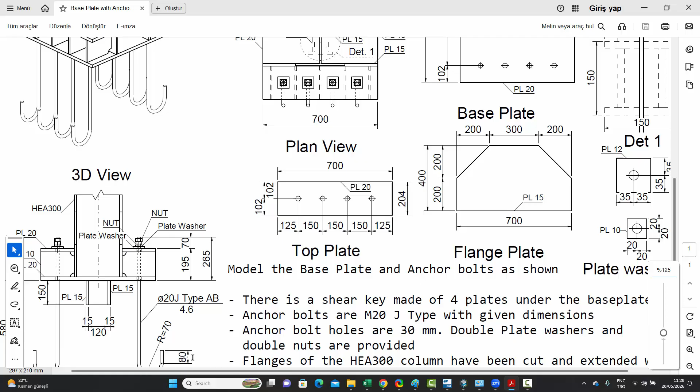So this is the assignment which we have. It's basically a base plate with anchor bolts, and that's what the exercise will be. The base plate is different from normal base plates in the sense that if we zoom in over here, you will see that it's got two levels over there to make it stronger against bending.

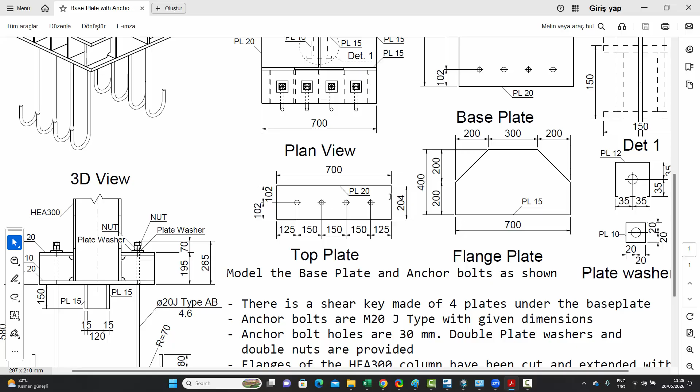So the base plate itself is drawn out over here. It's a 700 by 700 base plate, and then at a height of 195 millimeters above the bottom of the base plate, you have another plate on both sides, and these plates are called the top plates. Their dimensions are given over here. And the column itself, which is an HEA 300, the flanges have been cut out because these plates over here, the flange plates, are basically extending the flanges into the base plate as shown.

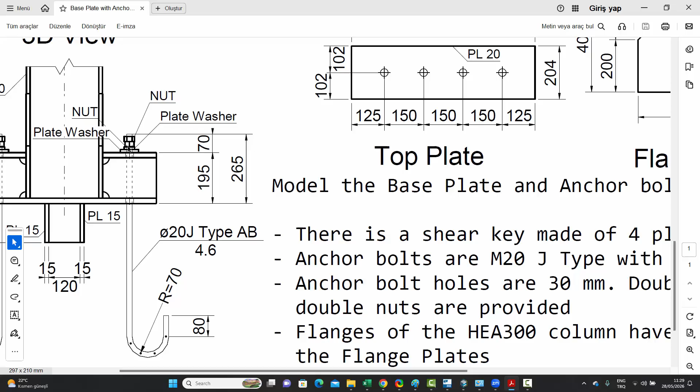And then the details, of course, of the anchor bolts themselves, what the diameter is and what the bending. These are J-type anchor bolts. So what the diameter will be, what the radius will be, how much the extension will be, how many plate washers we will need at the top, and a nut, and the length to which it extends below the base plate. All that information is given, and we need to model this in Comosys.

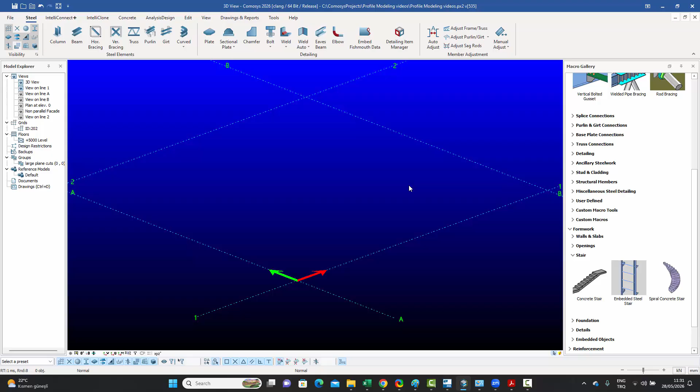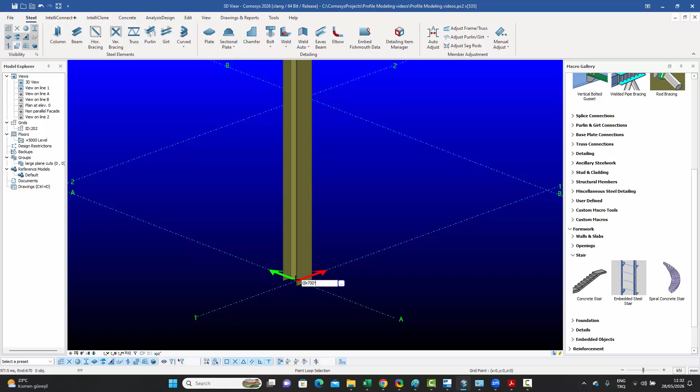So let's begin by creating the column and the base plate, which, like I said, is 700 by 700, and the thickness of the base plate is given as 20 millimeters. So we go to the model, our column command, we enter a column over there, we change the section to HEA 300. And then we just need to create a 700 by 700 plate. So we can go to the plate, because it's a rectangular or square plate. We can just hover over this center point, the grid point, say enter, say DR 700 by 700. And when we say enter, that plate will have been created.

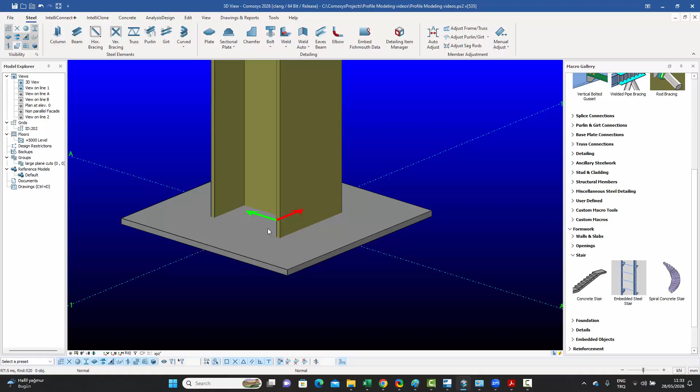Now, although not given in the exercise itself, typically the bottom of the column is actually the bottom of the base plate. So if I look at it from the side, the plate is entered as middle, which is not what we want. So I'll just select it and press Control W to bring it to that position. And since it's a 20 millimeter plate, all I need to do is double click on the column and give a start offset of 20 as well, so that it's not clashing with the base plate anymore.

Now let's get back to the drawing and focus on these flange plates, which are basically going to cut the flange of the column as well. These plates are given as 700 by 400. Let's not worry about these chamfers at the moment. So a 700 by 400 plate I want on both sides of the column. So I can go back in, choose my contour plate command, and just use these points over here because they're easily available. Don't worry about the location at this point.

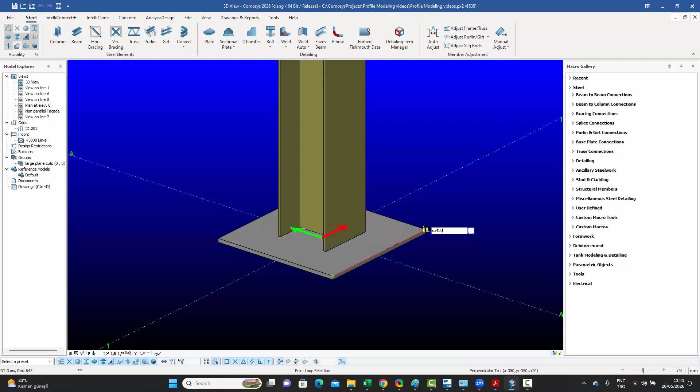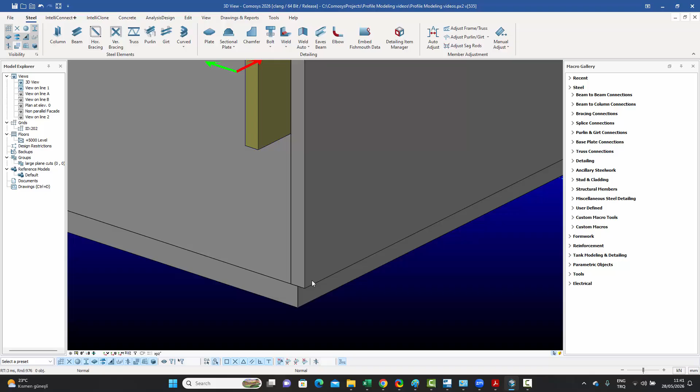Press enter, say DZ 400, go vertical, then hover over this point, enter DZ 400 once again, close the loop. The plate thickness was 15 millimeters, so we change that to 15 millimeters, and then we press Control W to make sure it's positioned like that. Then we need to move it so that this outside face is the same as the outside face of the flange of the column. So we just move linear. We can select this corner and any point on the edge by keeping the Control key pressed. And since this is a movement in the Y direction, we only keep that part of the move.

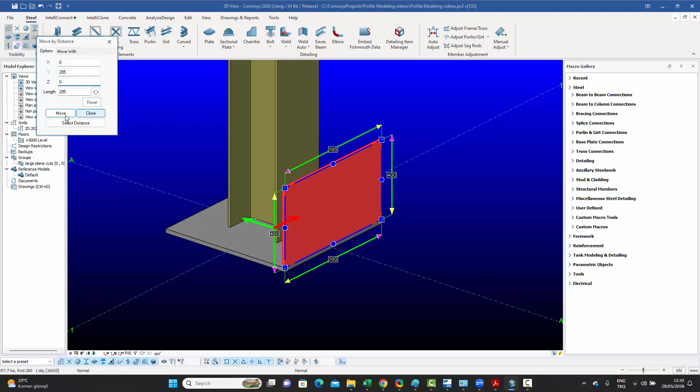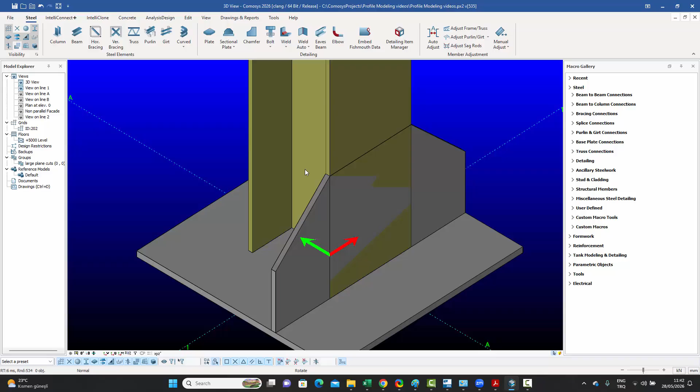And then we can give these 2 points chamfers of 200 by 200 as the requirement was. And once we have that plate in place, if we turn on the all visible mode, we can click on that, say copy, say mirror, and select the midpoint of this base plate across to the midpoint on the other side and say run, and we will have the two plates on both sides of the column as shown.

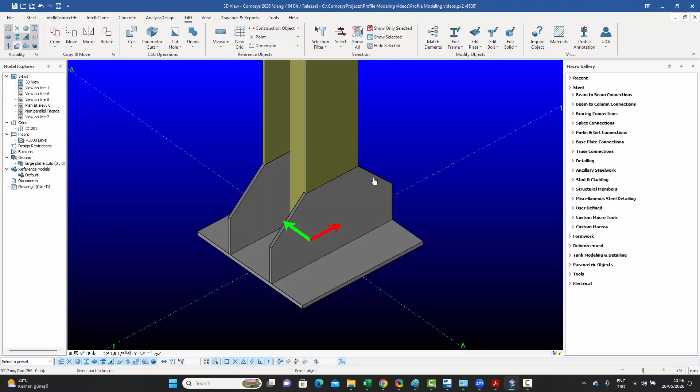Now that we have those two plates in place, we can simply go to the edit menu, the cut command, and choose the part cut. What we need to do is cut the column with these plates. So we say part cut, we select the column, we select this plate, select the column again and select the other plate. And if I select the column and say show only, you will see that the column has been cut. The flange thickness was 14 and our plate is 15, so it's just gone across one extra millimeter into the web of the column.

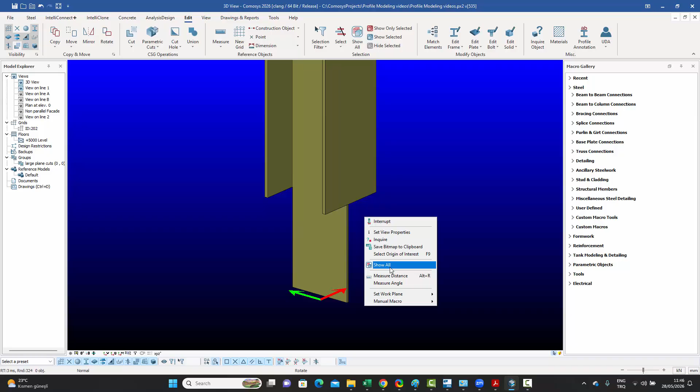So that was easily done, and we can now focus on the rest of the assignment. Now, I've just realized that in the assignment, if you zoom in, these flange plates are actually not flush to the outside. You see this little bump over there. They're actually flush from the inside of the flange. That doesn't really matter. It could be done both ways.

So we'll just continue. The only difference that'll make will be the width of these top plates over there. Instead of 204 millimeters, they'll probably be 205. Let's see. So let's continue with these plates now. The top plates. They're basically coming out of that flange plate all the way till the edge of the base plate and all the way across, because this length is 700 as well.

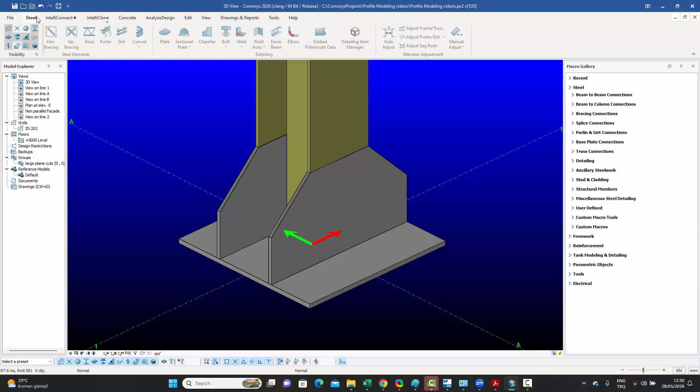So what we can do is go back to the model and go to our steel command, go to the plates. We can select this point and this point and this point, this one and this one, and we will get this plate. Let's see what the thickness of the plate is. The thickness of the plate is 20 millimeters. And if we zoom in, the top of this plate is 195 millimeters from the bottom of the base plate.

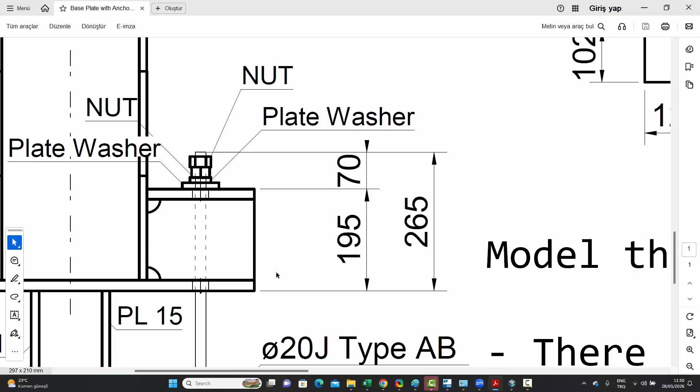So we can easily move that to that location. So first of all, let's change the thickness to 20 millimeters. And then remember this 195 from the bottom of the base plate. So for that, let's just select this plate. Let's double click to see the thickness. It's 20 millimeters, that's fine.

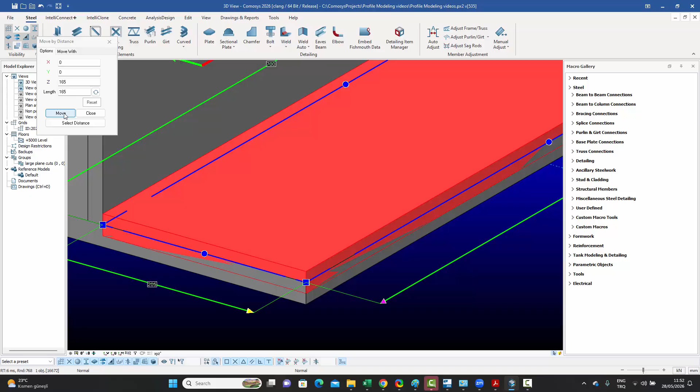Now we just say right click, move, and we know that the top needs to be 195 from the bottom. So we hover over this point and we press enter and we say DZ 195 like that. And that basically requires us to have a net movement of 165. So if we just say move like that, we can check the numbers. The top of this one should be 195 from the bottom over there, which is exactly what we want.

Now let's focus on these holes in the top plate, which are also going through the base plate as well, because the anchor bolts will be going through. So we'll just create these holes over there. They're 30 millimeter holes on both the top plate and the base plate.

So for that, if you remember, this distance is given as 102. It's in the middle of the top plate, and that's only because this one is 204. And if you remember, we didn't model it flush from the inside. We modeled it flush with the outside, so our distance is 205. So I'm going to make this 102 into 102.5 so that it's still in the middle. So keeping that in mind, this one is 102.5, 125 offset in this direction, and then basically 4 holes, at a distance of 150 each.

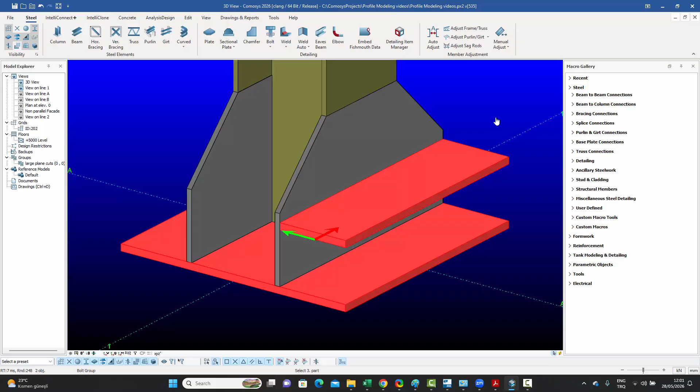So if I go back to the model, I can go to my bolt command with auto coordinate system. I can select this one, I can select the base plate, I can select this plate over here, right click, and I can just select an origin over here first and give it an X direction just to start off. It's going to give an error because it's right at the edge. I'm okay with that. I'll physically take this bolt and move it linear.

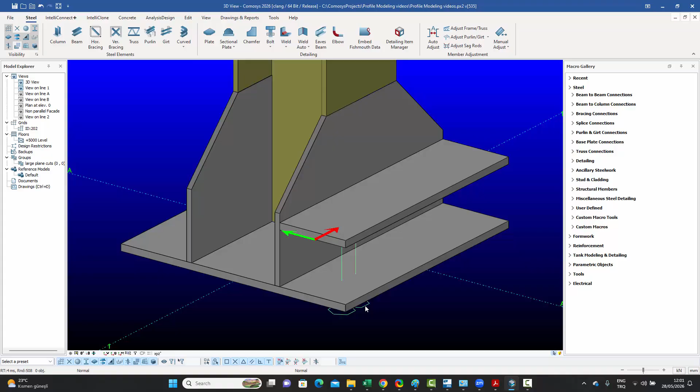In the Y direction, I want it to be 102.5, and in the X direction, I want it to be 125. I don't want any Z movement. So I'll just move it like that. It's still giving an error because of this distance. It's not able to find a bolt which is that long in the database. So I'll just double click on that and tell it that this is not a bolt, it's just a hole. If I say that, you will see that the bolts immediately appear.

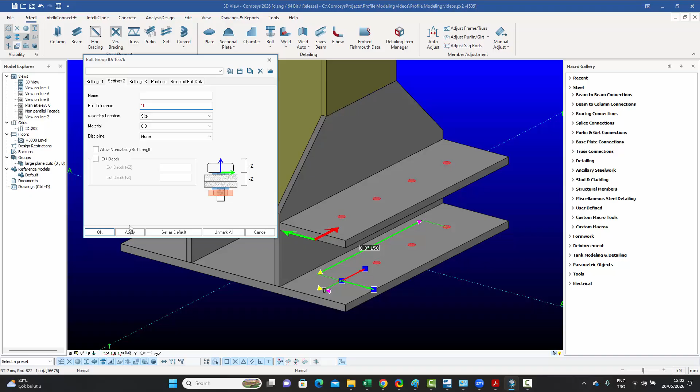Now all I need to do is go to the positions tab and give the 3 into 150, which was the distance between the holes, and there you go. And then one final thing, the holes were 30 millimeters despite the 20 millimeter anchor bolt. So we can give a bolt tolerance of 10 millimeters like that. So these are now aligned bolt holes for the anchor bolts.

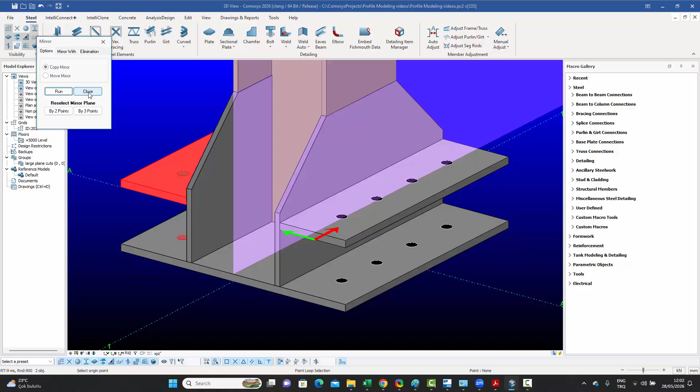And all I need to do now is just select this plate. Because these holes are going through the base plate as well, I can just select this top plate, right click, say copy mirror. The mirroring plane is already defined as the middle. I'll just say run. And you see that the holes are also brought to the other side and even to the base plate, because these holes are going through both of them at the same time.

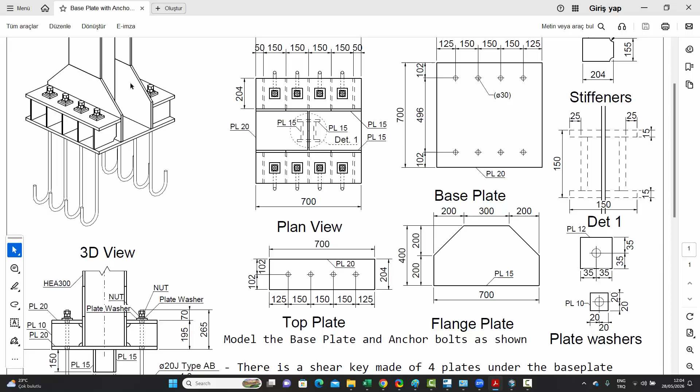Now let's focus on these stiffeners over here between the top plate and the base plate. These 5 stiffeners on each side. They're drawn over here as well. Once again, the 204 will become 205, but the rest will be the same. And the chamfer is 25 millimeters. They're located at 50 millimeters from the edge, and then 150, 150, 150, 150, four more copies, like shown on the drawing as well. And they're 10 millimeter plates.

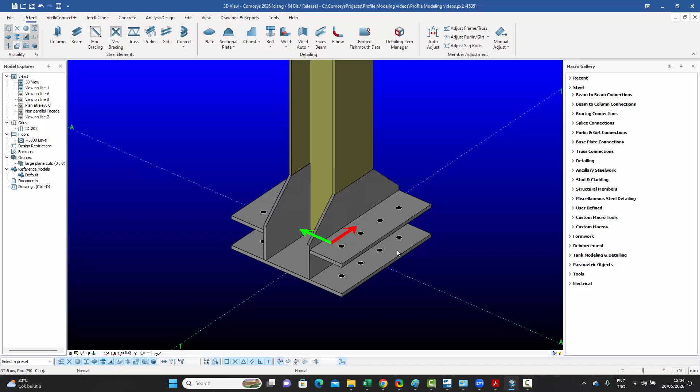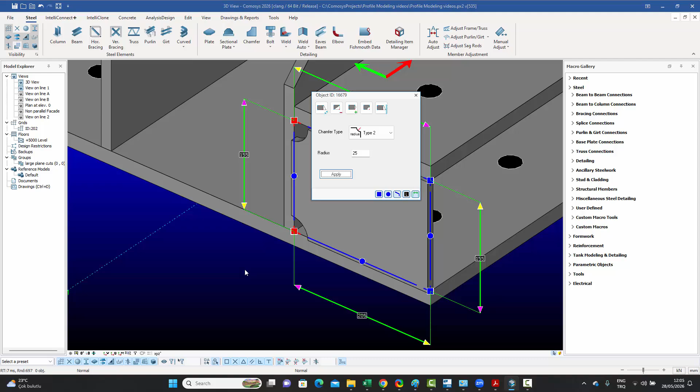So go back to the model, and we can go to the plate command. We can just select these corner points because they're available, without worrying about the exact location at this point, like that. This is a 10 millimeter plate, I'll just say 10. I'll give it a chamfer of, I think it was 25. We've got the chamfers inside, and we know that the first plate is at a distance of 50, and then there are 4 more at 150.

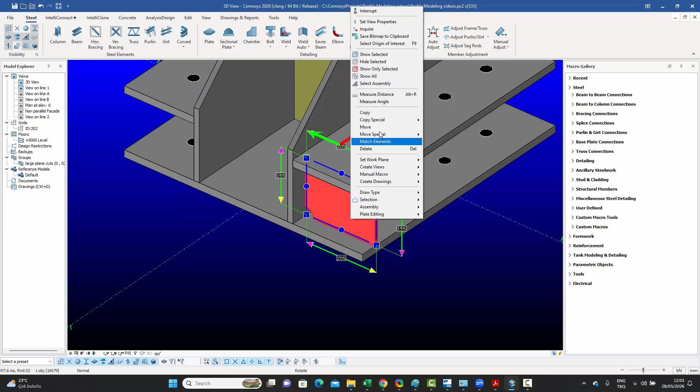So I'll go back to the model, select the plate, right click, say move linear, in the X direction. I'll say 50, like that. And then I need to copy them, 4 more copies at 150 each. Go back to the model, say copy linear, 150, 4 copies, like that.

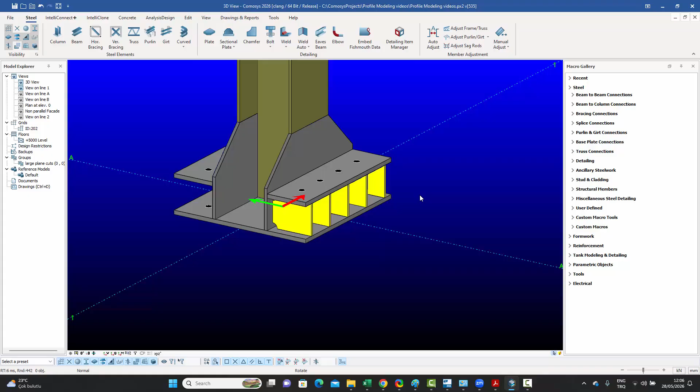So we have them. We can give them a different color if we want. It's perhaps a better idea, makes it easier to visually see. It's also a good idea to give them names sometimes; when you're annotating drawings it's better to have them with different names, but for the moment we'll just continue with what we have. We'll just select these plates, right click, say copy mirror. The mirror plane is defined. We just say run, and we have the plates on the other side as well.

Now let's get to the anchor bolts themselves. If we come to the formwork menu on the right, inside there's a sub menu called embedded objects, and over here you will find the anchor bolt tool. When you click on that, it asks for a point, so you can select a point and it's going to create an anchor bolt there. But if you right click at this point, it can also ask you for a plate, in which case it will find all the holes on that plate and create anchor bolts for each of the holes.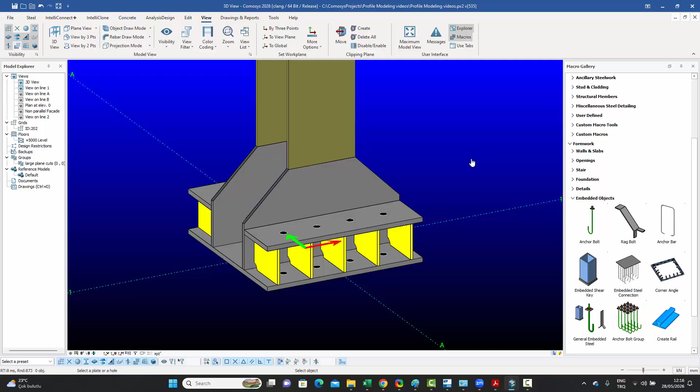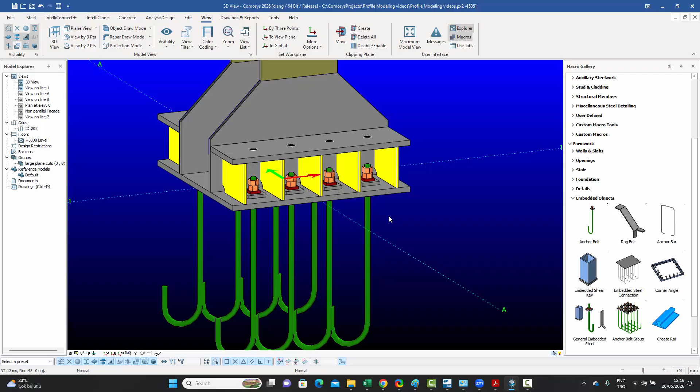So I've right clicked over there. I'm going to select the base plate, and when I do that, I immediately get my 8 anchor bolts. We'll of course modify them now, because mine are obviously different. It's a 2-level base plate. These ones need to come out all the way to the top. There are certain distances given, etc. So we need to work with this.

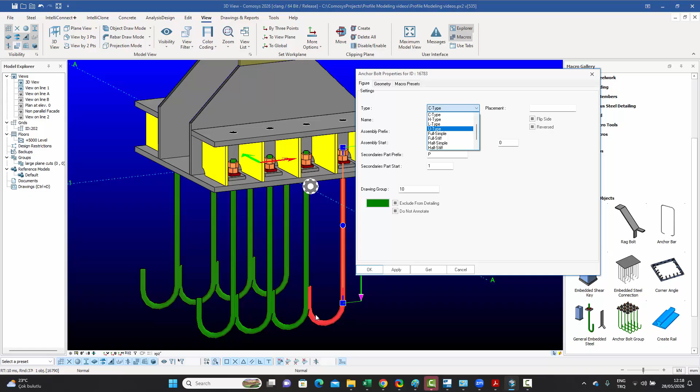Now, they're all separate anchor bolts, and each can be modified individually. If we double click on one, we see there are 3 tabs: the figure tab, the geometry tab, and the presets tab. In the figure tab, we have the type, and we can change it. This is the J type, which is actually the one we want; in this case it's called the C type. There's the H type, which looks a bit like that. Then there's the L type, which is a bit like that.

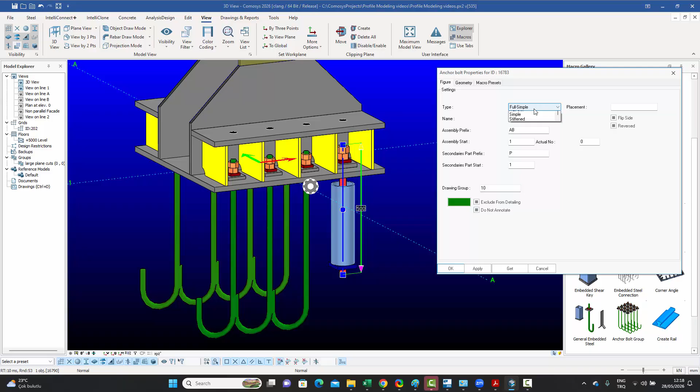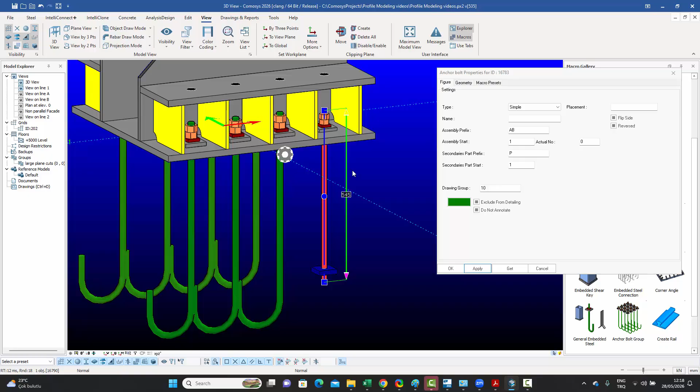There's the U type, which is not really used in steel base plates, but can be used in other situations. There's the full simple, which has got a pipe around it to increase the adhesion. There's another one with end stiffeners as well. Then there's the half simple type, which has got a partial pipe, and half with stiffeners. Then there's the simple type, which is basically the normal typical anchor bolt, and the stiffened one as well.

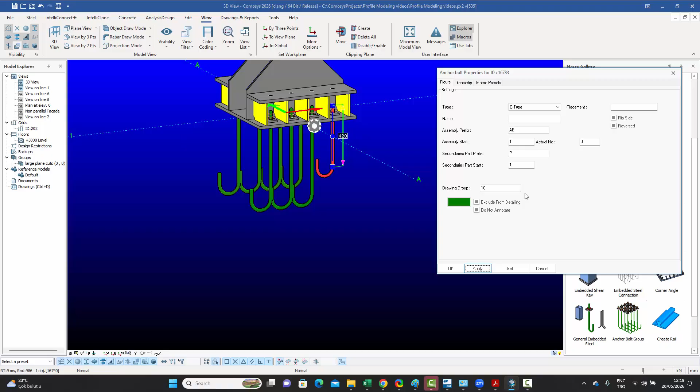So several different types. We can come back to the C type. There are a few at the top as well: the headed type, the threaded type, and different types over there. We want the C type at this point. But the thing is, where is it getting this information from? So once I choose the type, I come to the geometry tab over here.

I can choose the diameter. If I choose M20, like that, it changes the length as well. It changes some other parameters too, like these bending radii, these lengths, how much it protrudes outwards. It's got assumptions on the grout under the base plate; you can change these. It's got an assumption on the thickness of the base plate. You can change those.

You can change this number of how much it is protruding from the bottom of the grout, which is basically the top of the concrete, where the concrete will be poured, how much it needs to protrude out, and how much it goes in before it starts turning. All that information is given over there.

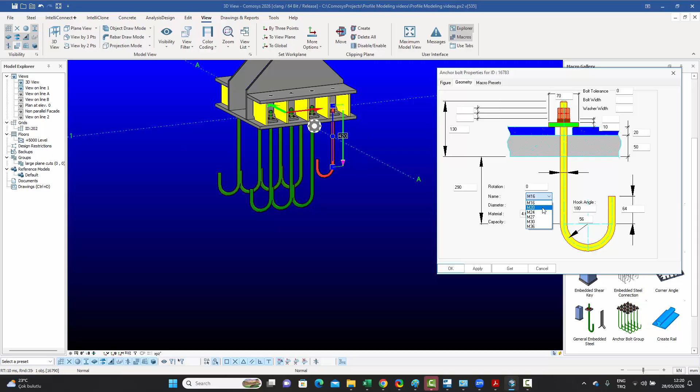But the thing is, when I change diameter, for example, if I go for an M30, some things might change. The lengths might change. So M16 was shorter, if you remember. It's getting all this from a file, and this file is actually, if you go and click on the preferences folder, and you go to the company preferences folder, you can also have it in the local, but right now it's getting from there, I think.

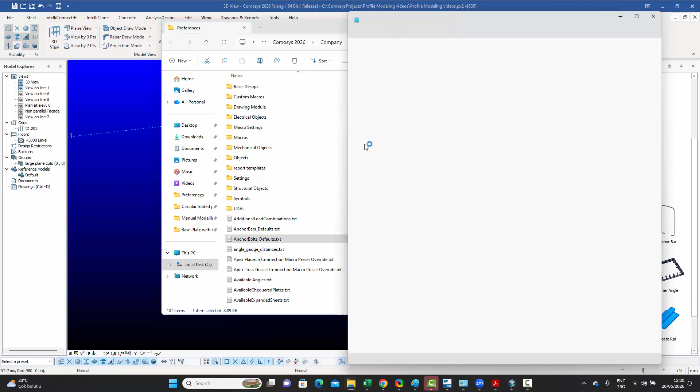If you come down, anchor bars, anchor bolts, anchor bolt defaults. This is the file. If I double click on that, it's a text file which you can actually modify. So if you remember, it had all these types. It had headed type. It had the threaded type. In our case, it was the C type. So it's got 6 C types already in that file. And for each type, there's the diameter, 16 millimeters, 20 millimeters, 24 millimeters, 27 millimeters, 30, 36.

And for each one of these, you have these geometric attributes which it uses to actually create the lengths. But you can always go and modify those lengths from the tool itself. But you can also arrange this file or modify this file so that automatically it brings up what your company standards are. So if you want to do that, you can modify this file, you can add new types,

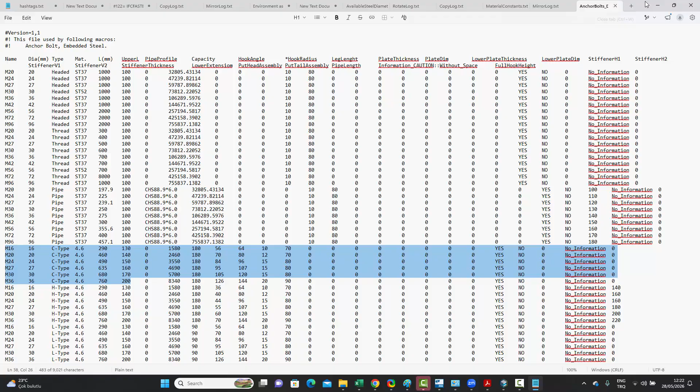you can add new diameters. And once you're satisfied with that, you can actually take this file, and like we've shown in the other exercises as well, which are related to setting up your environment, you can copy this file from your local folder to the related cloned environment folder as well. So all that is possible. But let's come to our particular case.

So in our case, it's an M20 anchor bolt. It says Phi20 J type anchor bolt. 4.6 is the material. And the total projection from the bottom of the base plate is 580 to the bottom of the anchor bolt. That's what's given, this 580. And this includes this bending radius of 70 millimeters from the bottom of the base plate, remember that. So 580 from the bottom of the base plate all the way down, including a 70 millimeter.

So if you go back to the model, you will see that first of all, this distance is not given from the bottom of the base plate, it's given from the bottom of the grout. So right now, including the grout, the grout is 50. 50 plus 460 is to this point. That's 510 plus 70. So it is already 580. This 70 is the radius. You can change these numbers, but the defaults happen to be the same as our assignment. But we could, of course, increase these numbers or reduce these numbers.

All we need to do is just count the grout distance, this distance after the grout, and then add to that this distance over here. The other requirement was 80 millimeters straight portion up and this 70 millimeters bending radius. Those are also according to the assignment. You can change this if you want, but in our case, we don't need to. This 80 is the same as well. We'll be working mostly on this area.

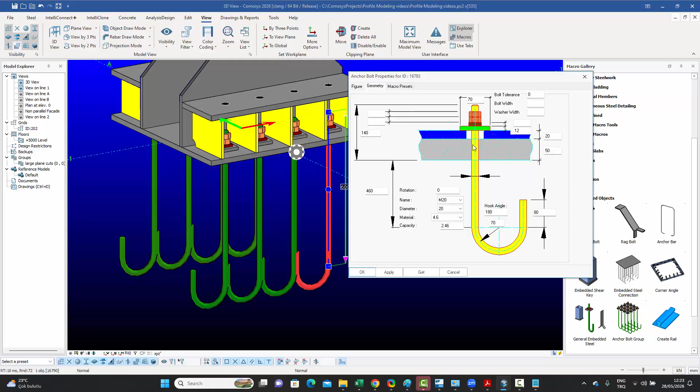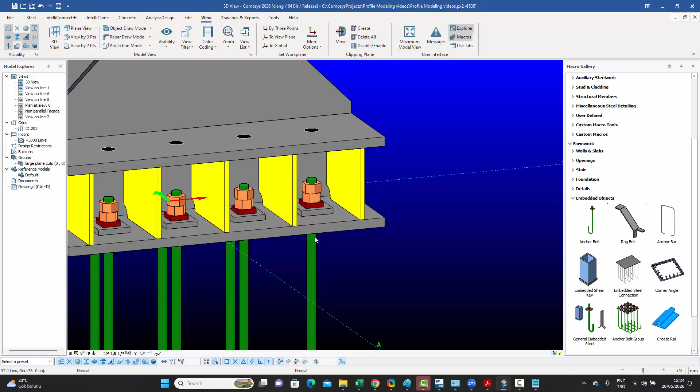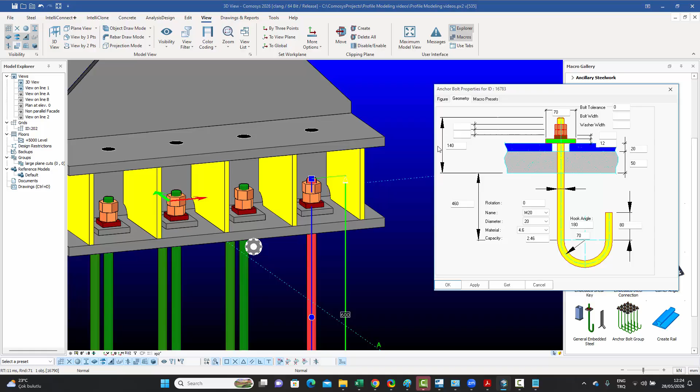So right now, if you notice, if I just close this, this anchor bolt is coming and basically ending at the base plate, whereas I wanted to actually go through to this other top plate as well, come out on the other side. And I know that, so let's see what my distances are showing. So I've got control from the bottom of the grout to the top of the anchor bolt. So since it's assuming a grout distance of 50, what I want is actually for it to come out. So how can you do this?

Let's see. So this is assuming a 20 millimeter base plate. What if we make it assume, let's go right click and say measure distance, and from here to here, this one is 195 from the bottom of the base plate to the top of the top plate. So what if I enter this distance to be 195, like that? If I do that and I say apply, you will see that these nuts and these washers and these washer plates, etc., they have all been moved to that point.

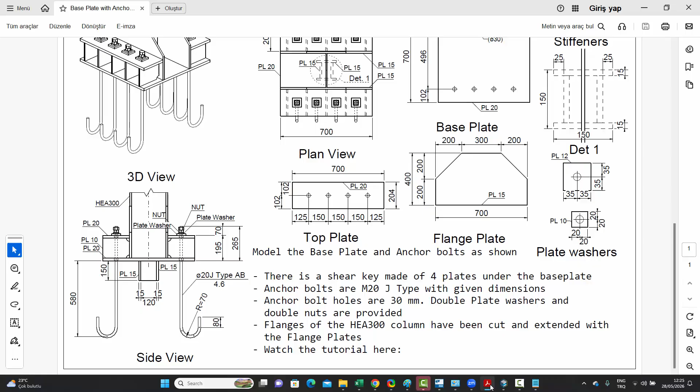The other thing I would want to modify is this, how much the anchor bolt itself protrudes above that. And for that, let's go back to the drawing, from the bottom of the base plate, it is given as 265. The bottom of the base plate, 265. So in our case, we'll need to add, because we have control from the grout. So if it's 265 from the bottom of the base plate, it needs to be 305, I guess, to the top. Let's see. Maybe this one needs to be 305, like that, or a little more. 315, was it?

That number will need to be modified as well to bring the anchor bolt out to the exact position which we want. Basically, you'll be playing with these numbers to move the tip of the anchor bolt itself, and these washers and nuts you can modify. You can move them around. You can actually not create a second nut if you want by entering some of these numbers to be 0. You can play around with this and get the result which you want.

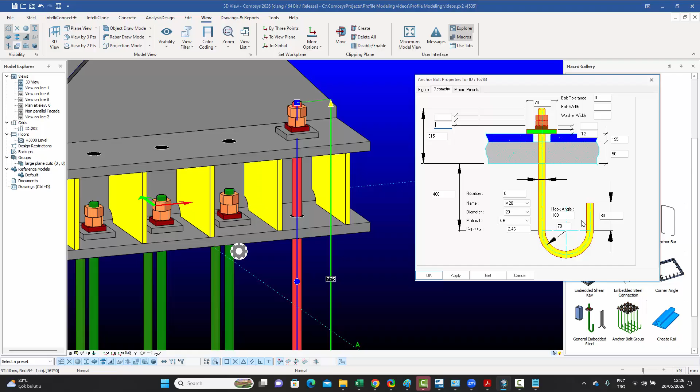So after having done that, once you're okay with one of those, what you can do is select all of them, right click and say match elements, and then select the one which you have modified. And once you do that, all your anchor bolts will be moved accordingly.

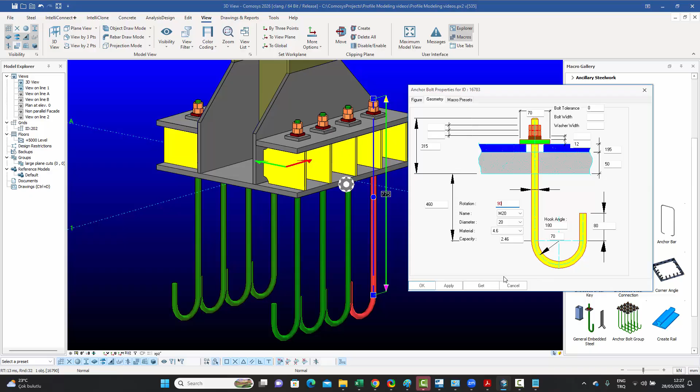Now, one thing we didn't do was maybe this one needs a hook angle, a different hook angle. Which one is that? The rotation, this one. So this one, if we call this 90, let's see what happens. So this is the one we want, that's fine.

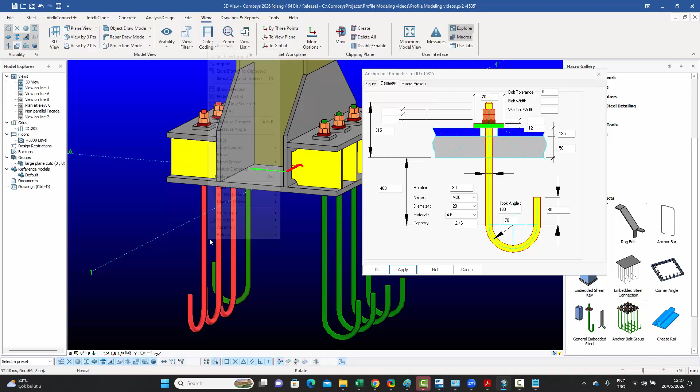So what we can do is we select these 4, right click and say match elements to this one, so that all point out. The other 4 will probably need to enter -90, so that they point in the other direction. And then we can just select the remaining 3, right click, say match elements to this one, and we will have our anchor bolts ready according to our assignment.

Now, if we zoom in over here, we see that we've got 2 plate washers rather, one larger one and then one smaller one before the nuts start. We've got 2 nuts as well, but we've got 2 of these plate washers as well.

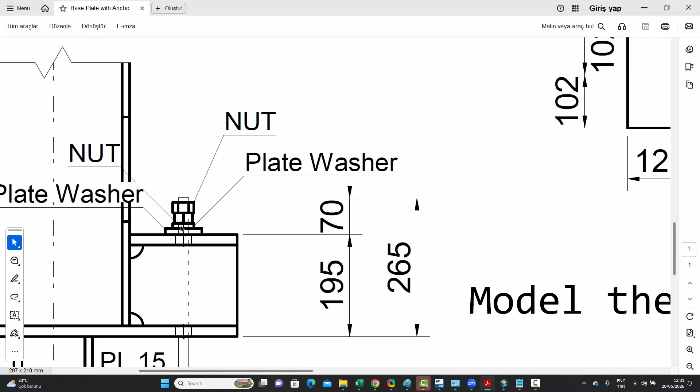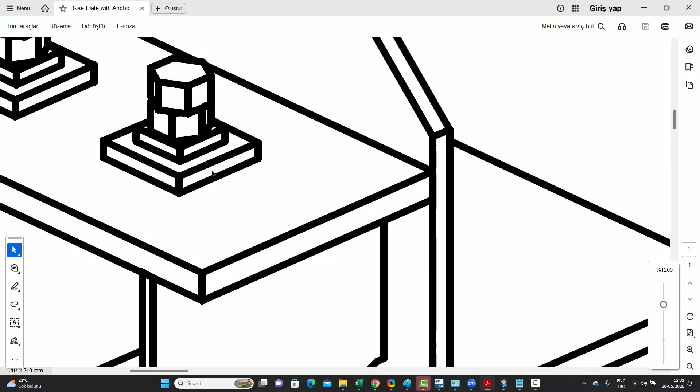So we have control, and the details are given over here. The bigger one has a size of 70. They also have the same holes because the anchor bolts are going through them as well. So the bigger one, by bigger one I mean this bottom one, has a size of 70 millimeters, if you remember from there, 35 plus 35, and the other one has a size of 40.

And we do have control. If you go back to the model, double click on the anchor bolt, we do have control over that 70. So this is the size of that washer, and you also have control over the thickness of this washer. And then the other one, the smaller one on top of it, you have control over its width as well, and the thickness over there. And then you've got control over the size of the nuts, etc.

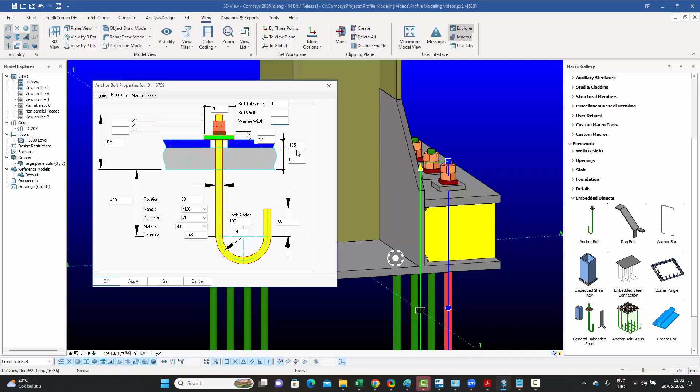Which you can change. So you do have almost complete control over what you want. You can read this information from the file, but that doesn't mean you're stuck with it. You can get the basic information about the M20 anchor bolt, and if in a particular case you want to modify it, you can still modify it from here as well. That will not change the file, it will just change that particular instance of the anchor bolt.

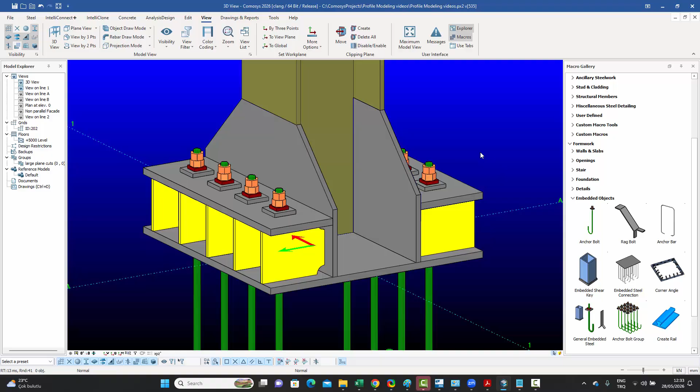So a very nice and quick way to create your anchor bolts inside base plates. It's generic because you can create any combination as well. If you already have a plate with holes in it, the better way to use it is to click on that, right click, instead of showing each individual hole, just show the plate. Or otherwise, if you've got some holes through which you don't want anchor bolts for other reasons, you can individually show the holes as well.

And like I said, many different types are supported, which is all backed by a file. So once you set up this file in your environment folder, you can very easily, quickly go about creating your base plates.

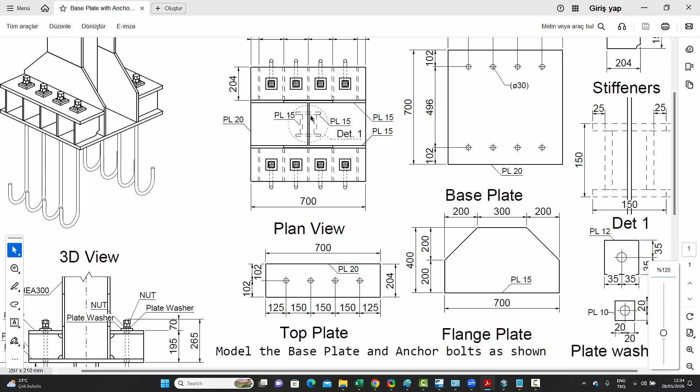Now, to be fair, there's a little shear key as well under the base plate, made of 4 individual plates. You can see it over here as well. I won't be showing that in this tutorial because those are just simple plates, you can always make them on your own. The basic idea for this tutorial was to actually mostly talk about the anchor bolts, because the plate commands you might already be familiar with, but to get you familiar with the anchor bolt tool.

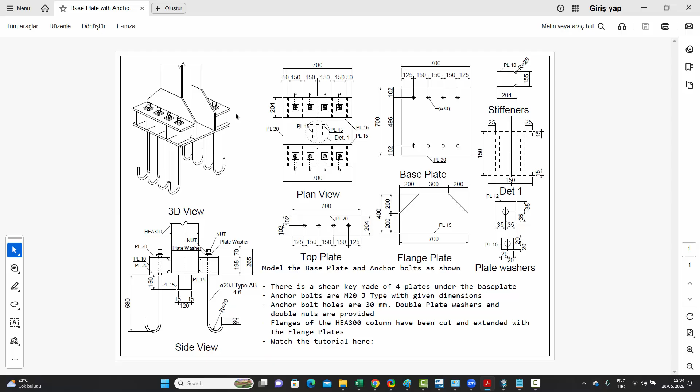So I'll leave you to finish off the shear key, etc., and then that will finish the assignment.